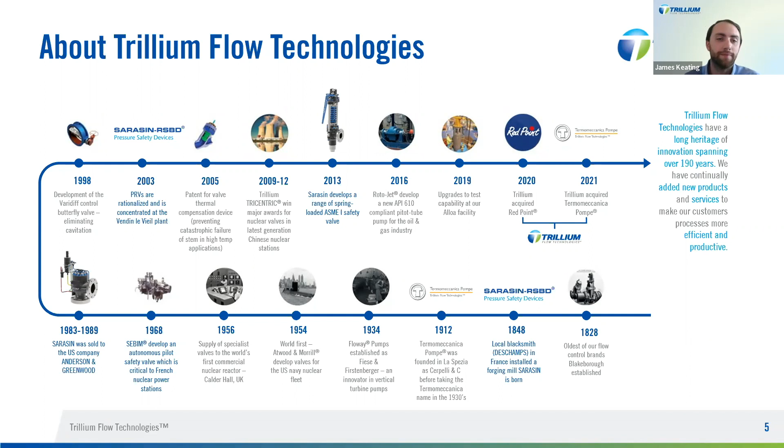Now we'll touch on the differences between a pilot-operated pressure relief valve and a spring-loaded valve, and ultimately why we decided to extend our product portfolio to the 78 series full bore.

Why should I pick a pilot-operated pressure relief valve? Regardless of whether it's a spring-loaded valve or a pilot-operated relief valve, a pressure relief valve is self-actuated and should be able to operate at any time, opening at the right set pressure and discharging at its certified capacity.

There are many benefits to selecting a pilot-operated relief valve, but in the interest of time, we'll focus on 3 of the key benefits here. The first is performance in terms of high back pressure.

Back pressure has a direct negative impact on both set point and capacity, and can potentially reduce the valve's lift. The situation can worsen when the back pressure is variable, because the set point becomes simply unpredictable. In the case of high back pressure occurring, a pilot-operated valve will be your best solution, since the main valve piston is protected by the guide and fully balanced, keeping your process on the safe side and mitigating process risk.

The second is pressure and size capability. When both capacity and set pressure exceed the limits of a spring-loaded valve, a pilot-operated valve is going to make all the difference. There are really two reasons for this.

So the higher the pressure, the larger the spring required for a spring-loaded valve. And that spring has to fit into the bonnet volume chamber, which already has limited space to begin with, and that spring cannot increase infinitely.

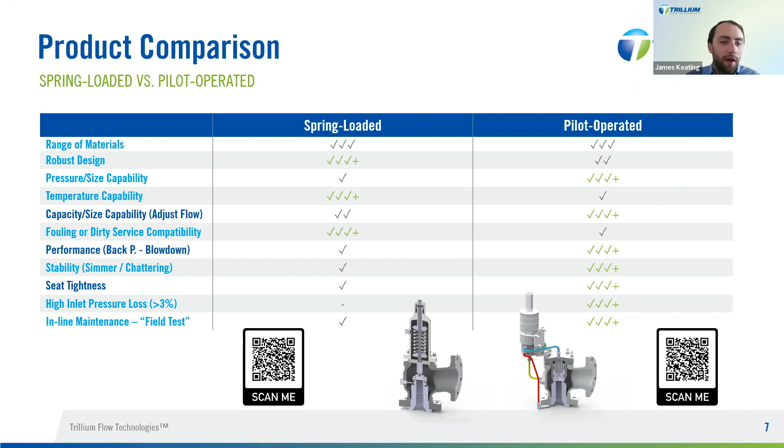And so the pilot operated valve has many other different advantages and also additional components and options that can be added. And we'll introduce those later on within the presentation.

So before we dive deeper into the 78 full bore, its case study and principles of operation, I just want to give a quick overview of what the customer benefits are and what's gained from selecting this product.

So the main benefits of selecting the 78 full bore is that it provides that additional capacity while having a smaller inlet size and less weight compared to other API orifices. And so that extra capacity is going to drive down the quantity of valves required by the end user, and it's going to drive down your maintenance costs.

And so the enhanced seat tightness, this model has enhanced seat tightness, enabling the seat to remain perfectly tight up to 98% of the set point, as I mentioned. And this is going to allow for minimal leakage and maximum reduction in GHG emissions, and ultimately more throughput for your process.

And finally, and maybe most importantly for customers, is that the 78 full bore dimensions match those of major valve brands used around the world.

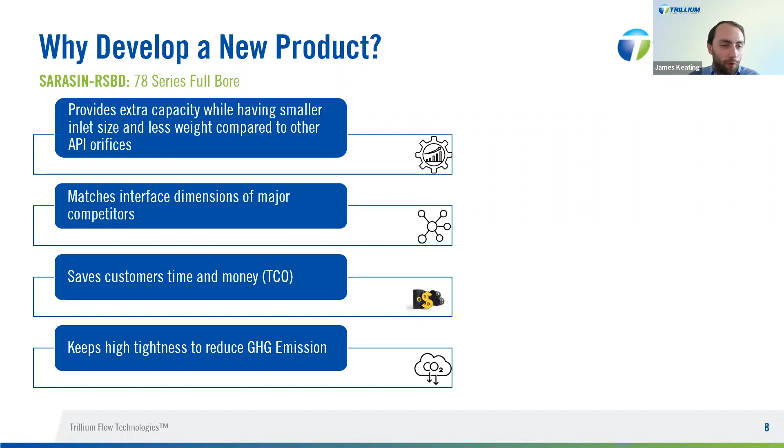So now we'll move on to a more detailed overview of our new 78 full bore pressure relief valve, and I'll hand it off to Sebastian Vermeulen to break down the features and benefits of this product.

Thanks, James. So as a start, let's analyze first the market and the reason why 78 full bore has been developed. So in the oil and gas industry, service conditions continue to increase and the operating pressure, what we call the money maker, has never been so close to the equipment design pressure, what we call the maximum allowable working pressure, to maximize process efficiency.

So in this environment, pilot operated pressure valve offers the best alternative solution, withstanding the highest operating pressure and relieving the highest capacity. This new valve has been designed to meet customer specific needs and or a specific line in the process where high capacity is required.

For sure, 78 full bore cannot only be the main solution and the unique solution in your process, but on some specific line where you need extra capacity, where finally you reach the limits of API. In that case, this valve can be a good alternative solution that will lower your total cost of ownership.

Again, during our customer visits that include a refinery, LNG plant, we performed some voice of customer. And during this visit, it has been identified that API standard 526 standard pilot operated valve can be part of a multiple selection. So it means on the same pipeline, you have some valves installed in parallel and that are staggered. And in that case, it could be replaced by this new design.

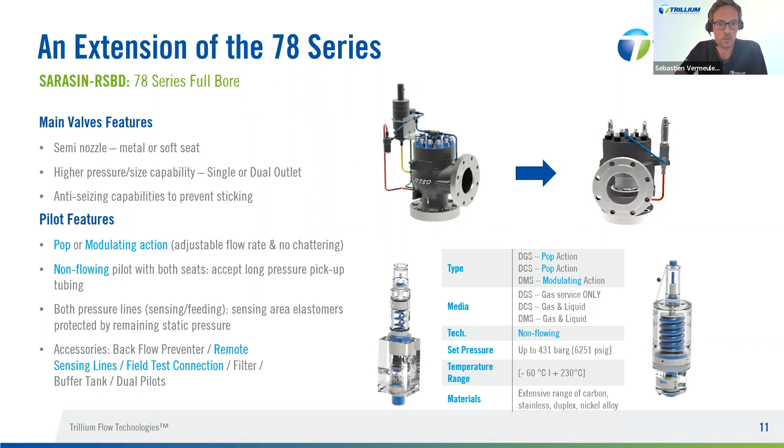So for those of you attending this presentation but not familiar with our brand, let me give you some color on this product.

Historically, we have two types of pilot operated valve. On the left hand, the 78 series, what we call the semi-nozzle, because the nozzle is integrated into the body. So the POPRV, the 78 series, represents a perfect product that meets 100% of the requirement of API standard 526, with standardized dimensions and the possibility to interchange with another brand.

In a nutshell, the 78 series pilot operated valve meets the requirement of EPC contractors who want to stay as close as possible to the API, because API is a guideline. They are very comfortable with API, it's okay for us, and in that case they don't accept any deviation.

On the right hand, we have the 76 full nozzle. It is exactly like a spring-loaded type, so you screw the nozzle from the bottom. The wetted parts are limited, the body is protected. So this nozzle, as previously mentioned, offers the advantage of limited parts and is therefore preferred for corrosive applications, easier maintenance.

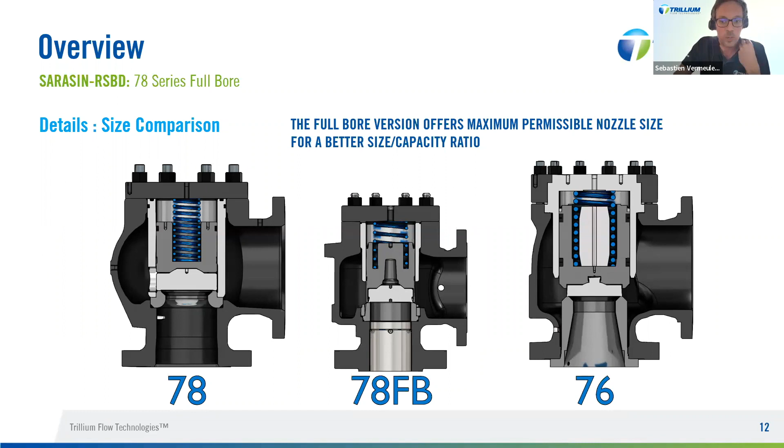So let's go more in detail regarding the principle of operation of this product. The 78 full bore is available in two versions, either single outlet or dual outlet. There are 7 sizes for the single outlet, 6 sizes for the dual outlet.

We have 2 certificates for this product, for gas and liquid application, but it's one single certificate whatever the product configuration, single or dual outlet. At the end, it's one single certification. That's the reason we mainly qualified the section area, and in total we propose 9 section areas. Some of them overlap between the single and the dual outlet.

Each configuration, of course, has its own advantage. On one hand, the reaction force you will have on the single outlet results in support that will involve additional cost. On the other hand, it is true that with the dual outlet you don't need any piping support, but that will impose a specific piping connection. We offer the customer the choice to define the best solution for his process.

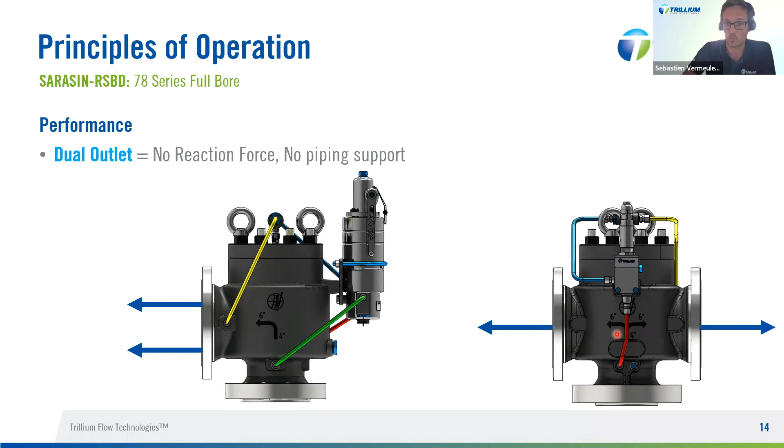But for sure, it needs to be defined at the beginning. So it's mainly for project OE markets, because from the beginning you need to identify what kind of piping you need to put in place to adapt such kind of dual outlet design.

Our experience in manufacturing pilot-operated valves, averaging 1,000 per year, leads us to reduce the volume of the dome. The piston is localized on the dome, and the dome is this section area here. So here you have a standard dome section area, what you will find on the 78 series.

We tend to reduce this volume in order to reduce, first, based on our experience on ASME I for the steam industry, where the criteria are very stringent, and the blowdown should be between 2 and 4%, whereas in ASME VIII the blowdown is more close to 7%. So to guarantee and increase the blowdown performance, we need to reduce the valve response time.

And to reduce this valve response time, we need to reduce the volume. The higher the volume, the higher the response time, because you need to pressurize and depressurize the dome - it's operational time that increases the valve response time. So our experience in this domain leads us to reduce this volume, to reduce the heat exchange, but also to optimize the main valve control.

So there are different kinds of solutions. We can either adapt an insert like here, or we can directly design a cast inless piston, what we did here. In that case, reducing the machining for spring location, using either inless casting or insert, allows us to offer a fair price for our customer, because the main specification for this kind of valve has been to be aggressive in terms of price.

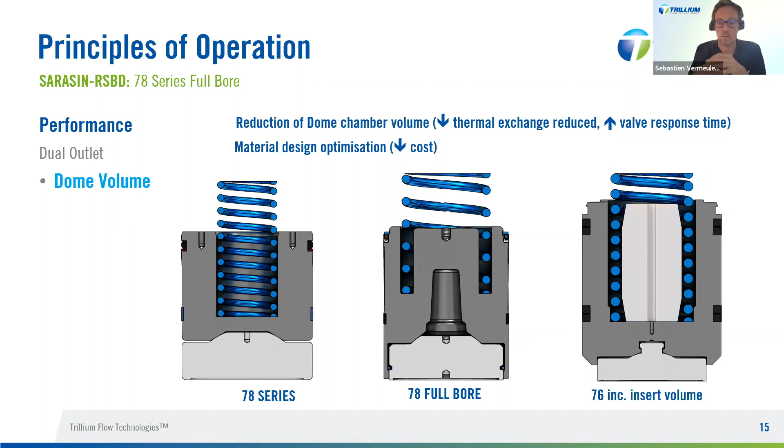Pursuing a cost-effective solution approach, but also optimizing our own stock management for spare parts, the valve has a unique trim per size. It's a real benefit. Don't get me wrong, we have 9 sizes, so we have 9 trims.

But the core DNA of the product has really been to reduce the cost, and it's interesting to keep the same trim whatever the pressure class. That permits us to limit spare units on the shelf internally, but also externally for our distribution networks. We keep it simple, minimizing the trim you need for spares - that again lowers your total cost of ownership.

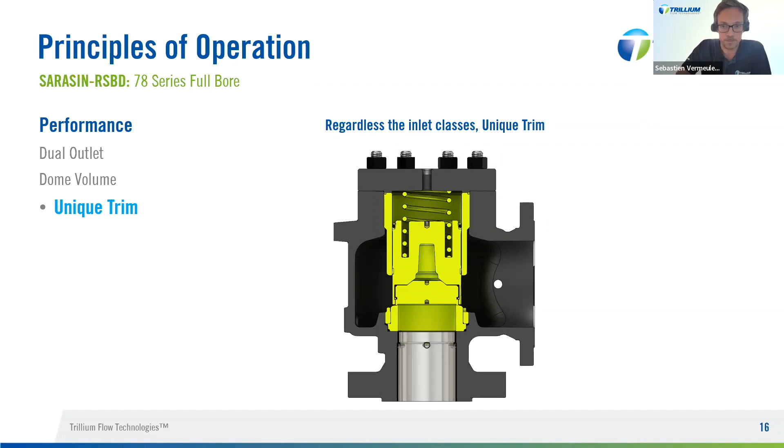For those who have been listening to me from the beginning, we said we address the LNG market. And for those who attended the webinar we did two weeks ago about the LNG process, you know that in the LNG process there's one specific part when you move into cryogenic condition to convert a gas into a liquid at minus 196 degrees Celsius.

We said the trim is unique - that's true regarding the pressure class, and that's also true regarding the service condition. The piston, for example, has been especially adapted to accommodate either an O-ring seat as standard or an energized PTFE seal for cryogenic condition. It's also true for any part, so here the piston design is unchanged and we can put in place either an O-ring or an energized seal.

Here also, on the bushing as well, there are some specific locations where we can adapt the gasket to make the valve capable of operating in cryogenic condition.

So whether it's about a retrofit, inventory stock management, or ease of execution in the supply of spare parts, the product has been designed to meet customer requirements throughout the complete valve life cycle. Much like a North Star, the product principle has been to reduce the spares you need to carry and lower the TCO.

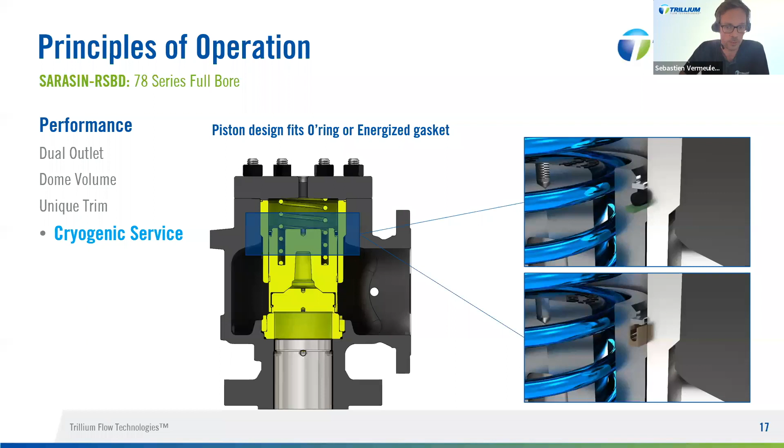More importantly, the seat, because the seat is especially discussed when we have technical requests from customers. In cryogenic condition, let's be clear, our own Sarasin recommendation will always be in favor of a metal seat. However, we know that sometimes it's necessary to meet specific customer requirements, and the soft seat is one of them. So let me give myself the opportunity to educate a little bit during this presentation.

A customer who knows how a pilot-operated valve works will recognize that the soft seat is useless, or only useful for spring-loaded valves. On a spring-loaded valve, you have the pressure and you have the spring. When the pressure increases, the disc starts to be balanced and the valve starts to leak. On a pilot-operated valve, the higher the pressure, the higher the tightness, because you pressurize the dome section area.

Forget the spring - you just pressurize the dome section area, and that increases your seat tightness. So it doesn't make sense to have a gasket, because in that case the gasket doesn't help to reach a higher tightness.

Furthermore, a damaged soft seat will tend to leak more than a metal seat. And for those familiar with failure mode analysis, you know the higher number of parts you need to consider, the higher risk of failure. So it's an advantage to reduce, to limit the number of parts and to not adopt any soft seats.

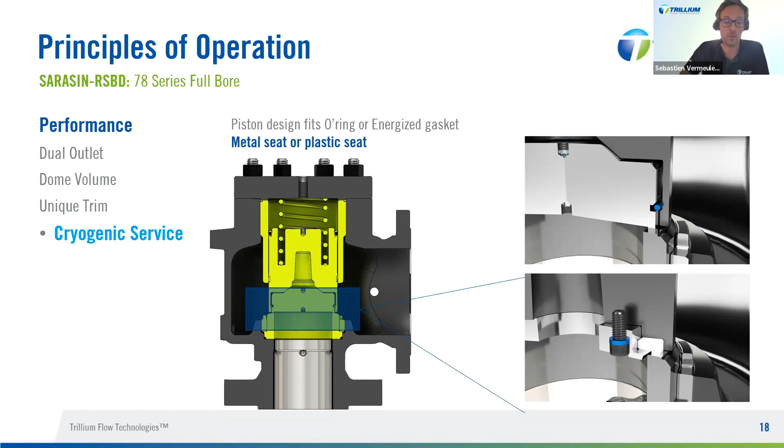But again, Trillium always takes a leading role and notifies the customer of any non-conformity, but we also try to meet all requirements by providing a soft seat when we cannot deviate and that is specially required on any specification. So we can propose either metal or soft seat, whatever is needed. We work with gasket manufacturers, and I can provide such kind of technology if needed.

So we reviewed some principles of operation and technical characteristics. Let's move on now to the case study to illustrate the valve performance compared to the 78 series. Let's try to be a little bit more factual here, taking into account a few metrics that will allow you to illustrate how much better this valve performs than its predecessor.

If we consider only the piping inlet size, what we are not supposed to do, to be honest, don't overlook that a safety valve is first designed as a unique solution for a specific overpressure scenario. So normally we don't care about the inlet or outlet. You have an overpressure scenario, we perform sizing to offer the appropriate set pressure, but also the relieving capacity to protect your vessel, your pressurized vessel, against overpressure. So that's normally the philosophy.

But just for the demonstration during this webinar, we just compare not apple to apple, because normally we need to compare the section area, but here just the inlet, at similar inlet flange, how much bigger, what's the section area difference? So immediately in this exercise, we can see the flow area can be up to 3 times larger.

If you take a look at the K orifice, a 3x4 offers a section area whose cross section is 2.09 inch square. And a similar full bore is 6.74 inch square, so it's 3 times larger, which is especially significant. The section area is so important on full bore.

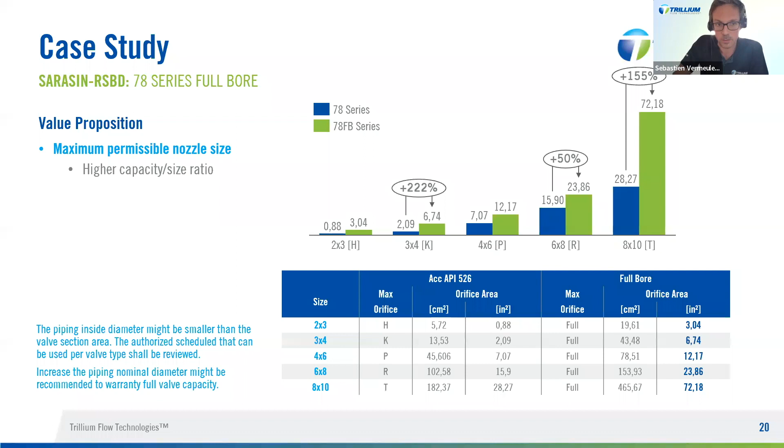We need to pay attention to the pipe wall thickness, what we call the schedule, for the valve sizing. Because, of course, we don't have to forget the rule of installation. The valve has to be installed vertically, but also we need to take care there is no reduction on the valve to guarantee the valve is able to relieve its required relieving capacity, the full capacity. Otherwise, the valve performance will be affected, of course.

So in a more practical way, let's look at a customer request to review. Here we have basic input data: set pressure, relieving temperature, required capacity. The fluid is steam to make it simple. And we have a comparison between, on one hand, the standard 78 series, on the other hand, the full bore.

On each scenario, you can see a multiple selection of valves that can be simplified by one single valve. So in the API, the API shows its limitation. Why do we use 2-valve or 4-valve orifice T? It's because in the API, you only have 14 sizes from orifice D to orifice T. Once the maximum permissible orifice is reached, it is necessary to switch to a multiple selection.

So it's an issue. The full bore appears at this moment as a valuable proposition, as the reduction in the unit count is drastic, up to 4 times less, as you can see for the PSV1 and the PSV5, when we reach the highest size, which can be replaced by one single full bore.

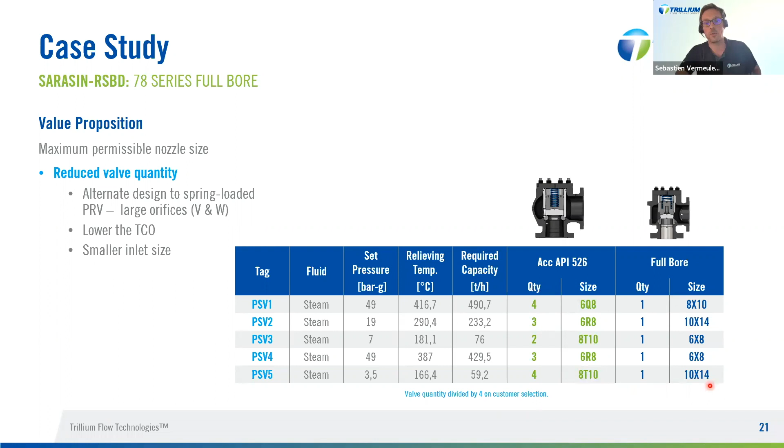This might seem a less important criteria, but weight is also a consideration, especially on offshore platforms, what we call FPSO, FLNG. Because the safety valve is first designed as a unique solution for a specific overpressure scenario, we are now considering equivalent section area instead of pipe or valve inlet flange size. So regardless of the technology, the pilot operated valve is mostly the preferred solution for such kind of market, FPSO, due to the fact that weight is reduced and the fact you offer a better capacity-to-size ratio.

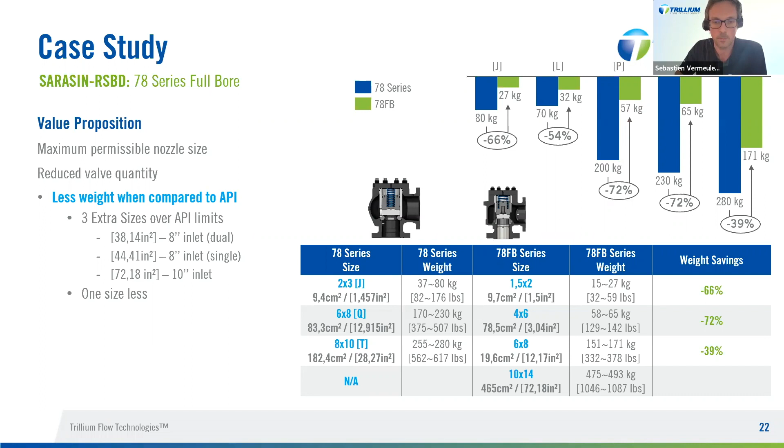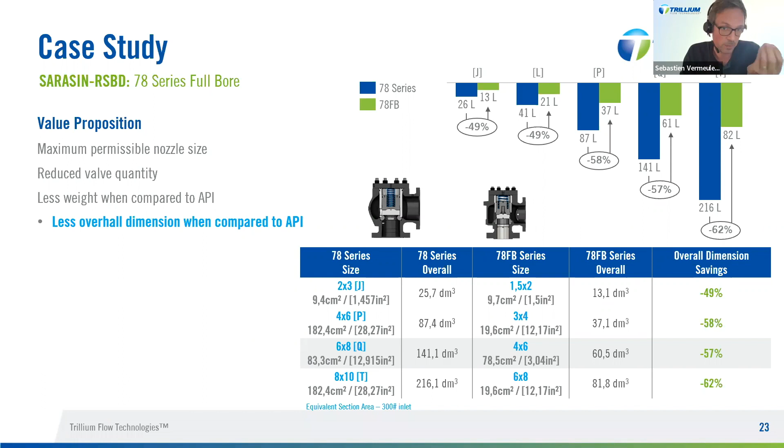The weight is reduced, the volume is also reduced. The search for performance requires a reduction in volume. If it's true for smartphones, it is also true for FPSO, where space on board is a criteria just like weight. Still comparing equivalent section area, the volume saving is also consistent, as you can see here.

Finally, no matter how good a solution is, it will only be retained if it fits in the market price level. In a world in full energy transition, the cost impact is at the heart of the debate. Here, the price again is a consequence, it's not magic. It's a consequence of all the technical features we presented before: the reduction of size, weight, and volume. So that has a direct impact on the valve price at the end.

We will explain again and again, but we need to compare. We cannot compare 78 series and 78 full bore of similar size, but rather compare valves with similar performance and therefore similar flow rate. Based on this comparison, the cost impact is significant.

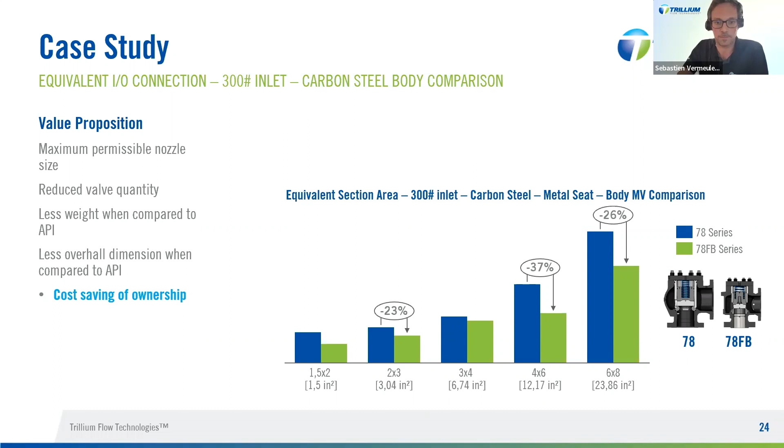So here is just an equivalent, just a comparison. We just consider a valve inlet pressure, inlet class 300 for carbon steel, metal to metal seat configuration. And it is mainly based on the body main valve comparison, because as we explained, we use the same pilot technology whatever the main valve type.

So let's move on now to some additional information, some options, some technical features we put in place. Let's go more in detail. It might seem pointless, but the bracket has been directly incorporated on the 78 full bore. It's just to show how well thought out the product is.

Based on our experience, and always with a view to reducing the parts that can be a potential root cause of failure, like the bolting for example, we have thought to integrate the bracket into the design of the valve. Here, the pop action pilot is directly connected to the main valve, directly integrated in the main valve. The bracket is a cast design integrated in the main valve.

On the modulating pilot, the bracket becomes unique. It's only one part. The bracket is not bent like here, it is just a single plate that will better resist seismic force, although it is true that this type of criteria, the seismic condition, is mainly considered on a nuclear requirement rather than oil and gas.

But as mentioned by James during this presentation, Sarasin and Sebim are two unique companies with one single headquarter based in France. Sarasin is oil and gas and power focused, power for conventional power plants, and Sebim is more focused on power for nuclear activity.

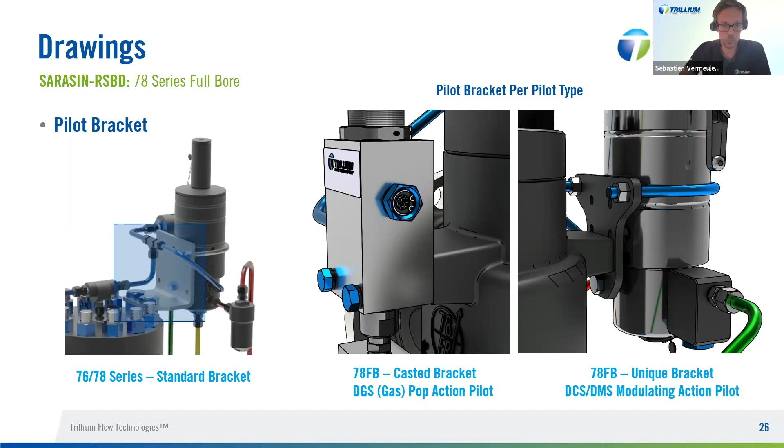So let's move on now to some options, like the field test. We supply standard options, so field test connection is one of them. Everyone will recognize one of the major advantages of the pilot operated valve is the capability to propose efficient inline maintenance. Any safety valve should be inspected every 1 year. However, the lift assistance device that you find on spring loaded valves is not really convenient or efficient, for two reasons.

First, due to the operational time to install the device in relation to the quantity of valves installed, because in oil and gas you can have thousands of valves, it's not like the power sector. And also the relative accuracy you may have if the operator is not skilled enough, not to mention the risk of damaging the seat and therefore causing a premature leak.

So from a cost analysis perspective, the field test connection is one accessory that significantly reduces maintenance costs. Unlike the spring-loaded type, it allows easy valve stroking with an auxiliary device, which can be either air or nitrogen powered. And without disassembling the valve, it's a three-way valve that will snap the pilot into open position and make the valve open regardless of the system pressure.

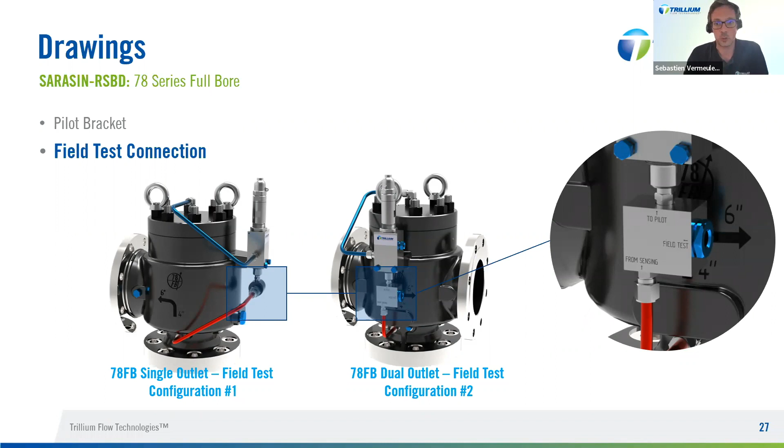So it's really convenient, really easy to use, and it will also lower your TCO. For all these reasons, definitely a pilot makes a difference, and such an option is really convenient to use and should be preferred when you adopt a pilot technology.

The backflow preventer is another one, which is very famous. As the name suggests, and as explained already by James, the backflow preventer accessory prevents the main valve from lifting early, eliminating the possibility to contaminate reverse flow. It's also a big advantage, because most valves are connected directly to the flare, so if the fluid penetrates into your process, you have a contaminated process. The backflow preventer prevents such kind of risk of contaminated reverse flow.

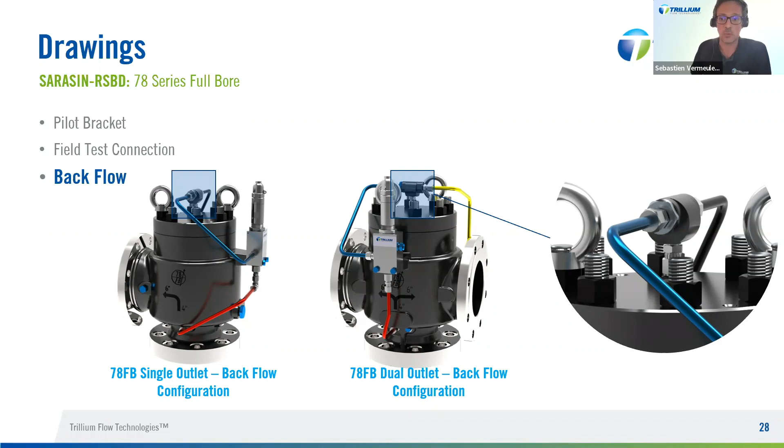It prevents the 78 full bore pilot operated valve from turning into its vacuum position when it is not required. Again, like field test, it's a three-way valve, which always guarantees that the higher pressure loads the dome, ensuring the valve will not open before the set point.

Another one, which is very famous, and most of the time that's the main reason why you need to adopt a pilot instead of a spring-loaded valve: it's a remote sensing line.

Sometimes precaution needs to be taken to control the chattering risk when you install a valve into your process. API already addressed some PRV stability issues through the 3% pressure drop rule in 1963.

So it's true, sometimes it can be an issue. It can be caused by either system instability or local pressure loss due to a flow path variation.

The pilot operated pressure valve offers the benefit of connecting the pilot to the pressure vessel through the remote sensing line, so it's a static line. Here you have the red line that will be directly connected to your pressure vessel.

Unless a net upward force is generated by the pressure vessel to open the main valve, the pilot will never actuate prematurely, preventing system-wide cycling and chattering, plus unexpected overhaul on the downstream equipment. This is a non-negligible option, as unresolved chattering can damage the installation.

So again, the takeaway is that such a solution will keep a stable open position, prevent chattering issues, and increase the system stability.

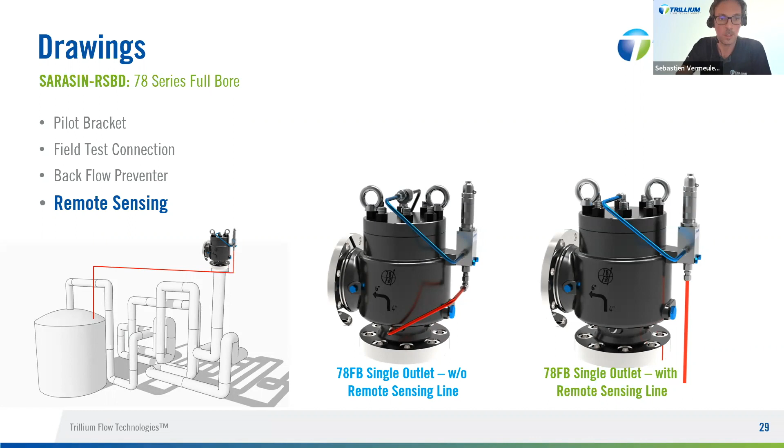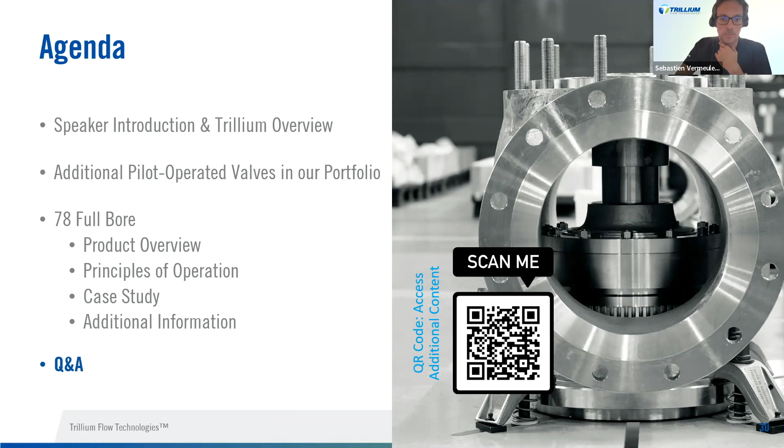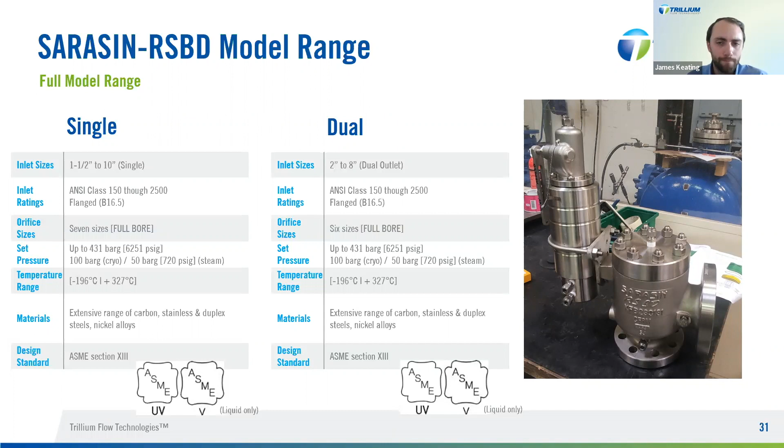This primarily speaks to the fact that the valve is able to provide extra capacity while having a smaller inlet size and less weight compared to other API orifices. So while the valve exceeds API criteria, it still matches the interface dimensions of all of our major competitors.

And since the 78 full bore is a pilot operated relief valve, valve tightness is ensured, particularly the zero leakage requirement, which will help mitigate safety and emission reduction challenges going forward.

This will drive a reduction in the quantity of valves required. It's going to reduce the required size and ultimately drive down maintenance costs and reduce maintenance time.

Also in terms of maintenance, the 78 full bore has that unique trim we discussed and can accept different gasket types, either a standard O-ring or a PTFE for cryogenic applications. This main valve design has been optimized to reduce dome volume and improve valve response time.

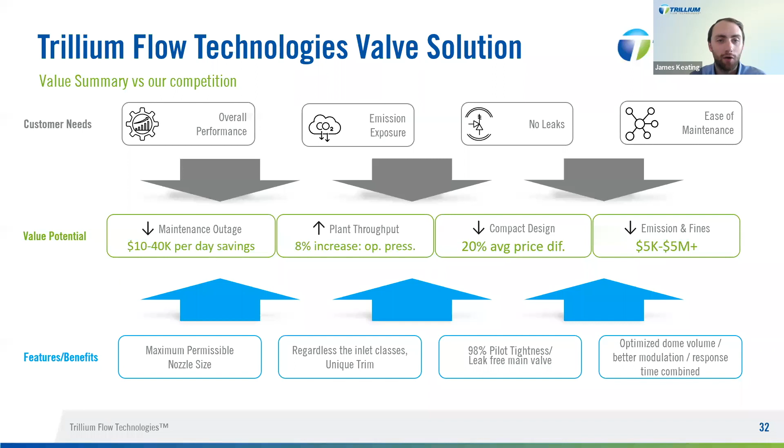And the benefit of the pilot operated relief valve makes it possible to achieve the highest possible operating conditions while reducing process loss and ultimately increasing throughput and getting more product out of your process.